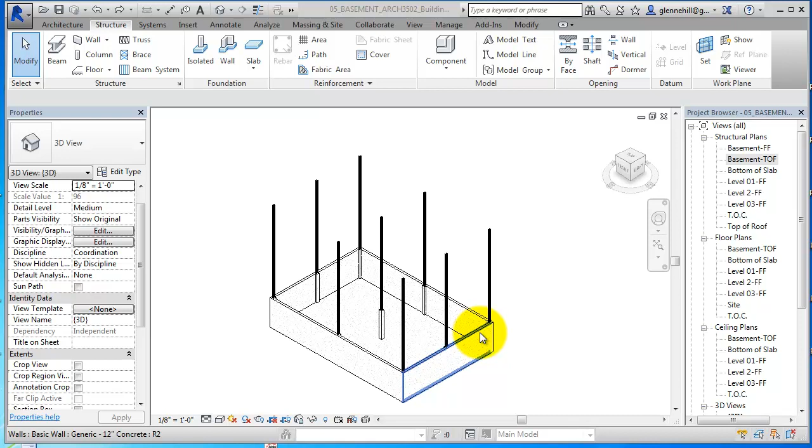In the previous tutorial, we covered putting the basement walls and floor in. So we can see right here we have a slab, our walls right here, and of course we put in the columns for our first floor, but also the columns that support the steel columns running up through the building. So they will come down, hit the columns, and the columns are going to hit upon a footing. And that is true with the walls too.

In Revit, it's usually easier to put in all your walls that you want to have footings and columns that you want to have footings under, then come back and add the foundation. In other words, unlike when you build it, which you start with the foundation and then you put those things on top of the foundation.

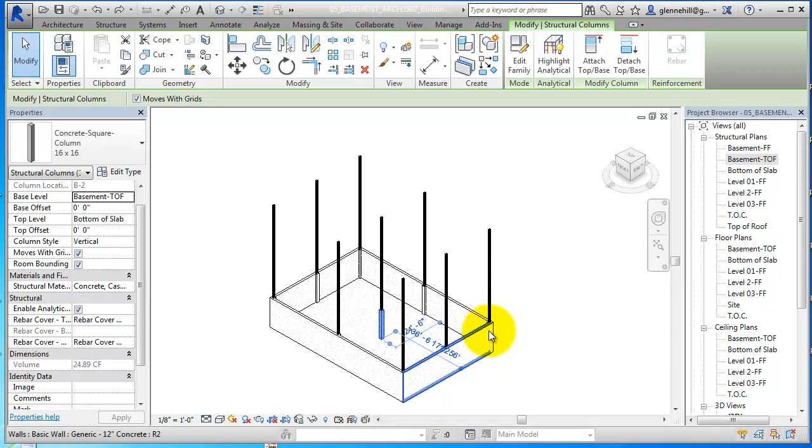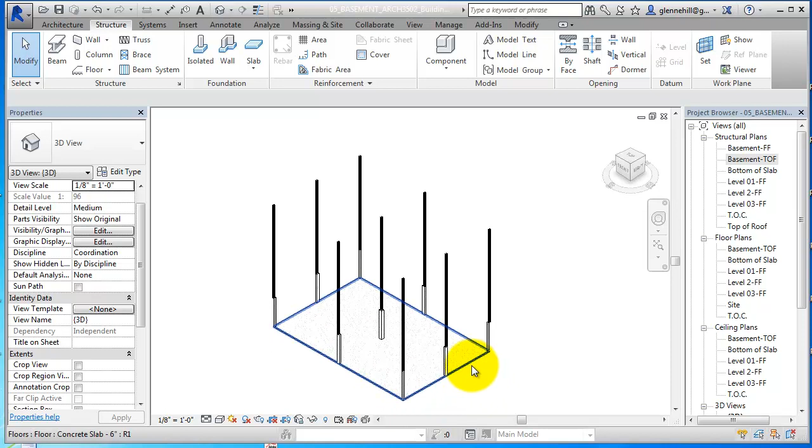So let's do this. The first thing I'm going to do is hide all of these walls because I don't want to visually see them while I'm working. So I'm going to hide by view category. Since they're the only walls on this view, I can just hide them all without hiding anything that I need. Also, I really don't need this floor, so I'm going to hide by element and get it down to the columns themselves. Now let's put a footing in there.

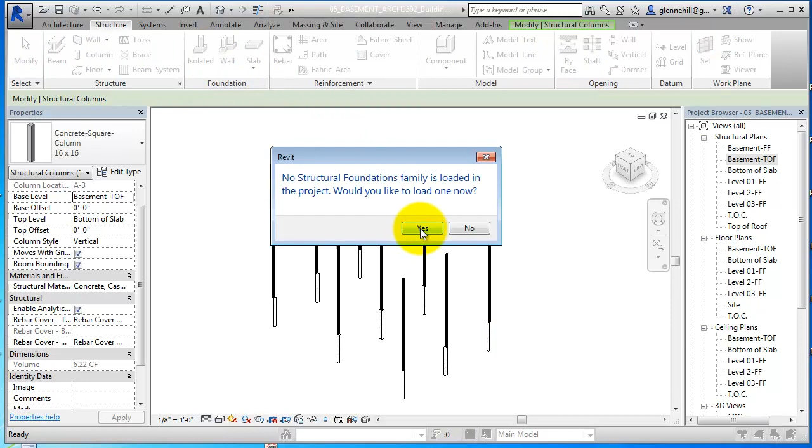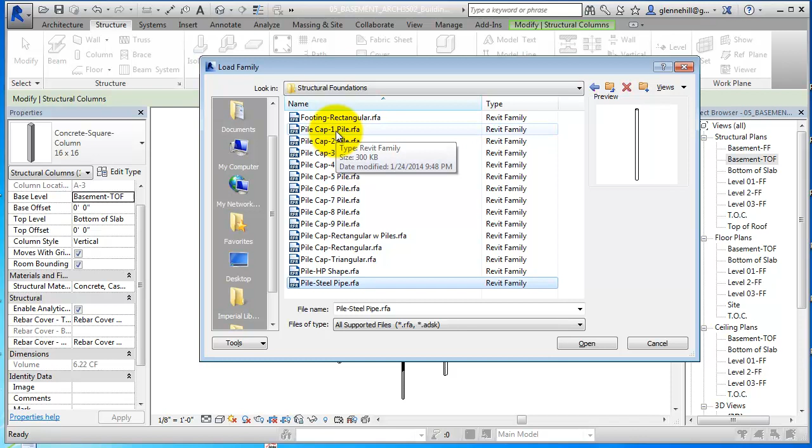So we're going to go to structure and go to isolated footing, and you'll see it says there's no families loaded here. So we're going to go to load families, down to structural foundations, and you can see a whole different bunch of piles - piling cap here, which is used with the piles, and then different types of piles, HP shape, which is a steel pile, and a steel pipe pile. I'm not going to worry about putting piling in right now. We're just going to go to a footing, rectangular, typical rectangular footing, and open that and load that in.

You'll see there's two default sizes, 72 by 48 and 96 by 72, 18 inches each. We don't probably need anything - well, we really don't know whether we need anything bigger than that, but that's a little bigger than what I told you in class. We just want a placeholder right now.

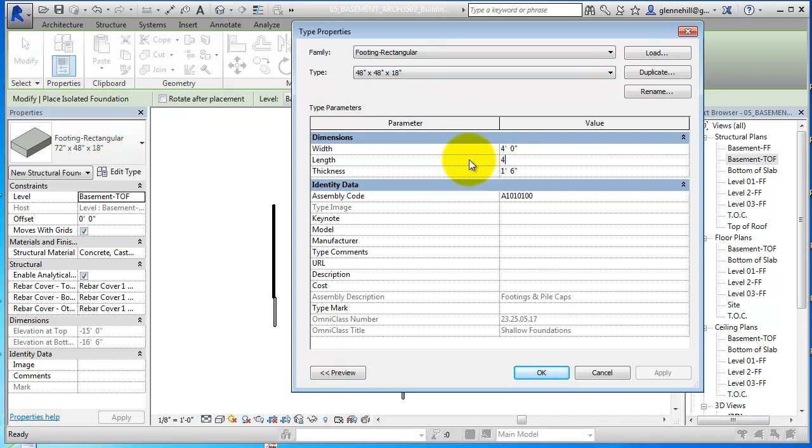So I'm going to edit type just to show you how to do this. I'm going to duplicate it, and then change this to 48 by 48. And then I got to change not just the name - I just changed the name, I didn't actually change the size. I'm going to change the size right here, so the length of that rectangular footing, and I'm going to say OK.

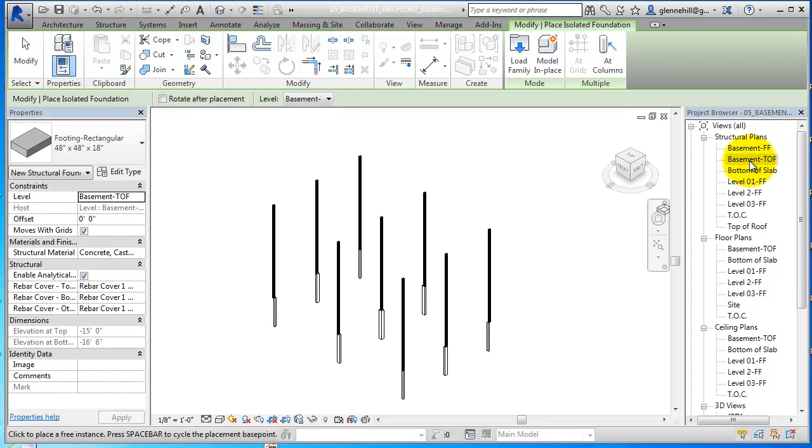So now you can see my little footing is on my insertion point, and I'm ready to insert it. But it'll be easier and quicker to insert it through the basement top of footing. This TOF is not top of floor, but top of footing - FF is finished floor. So I'm going to click on the basement, and we can see here's our basement view.

If we want to see the parameters of that basement view, we can go down here to view range and edit, and we can see that the cut plane is 1 foot above the basement level, the top of the clipping plane is at 2 feet, the bottom of the clipping plane is at -4, and the overall associated view depth is -6.

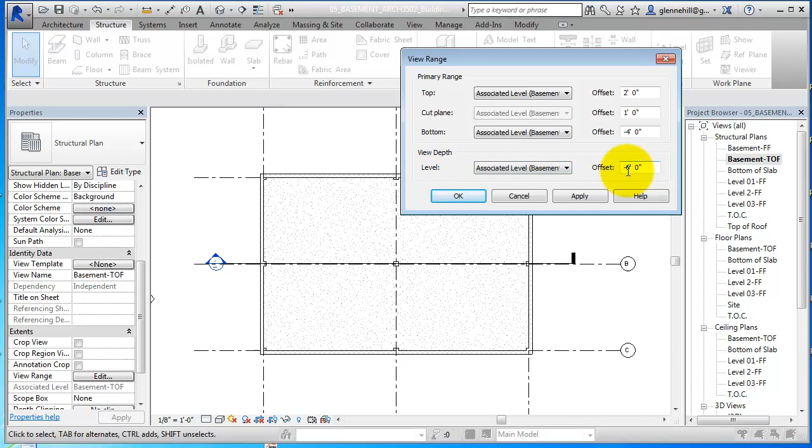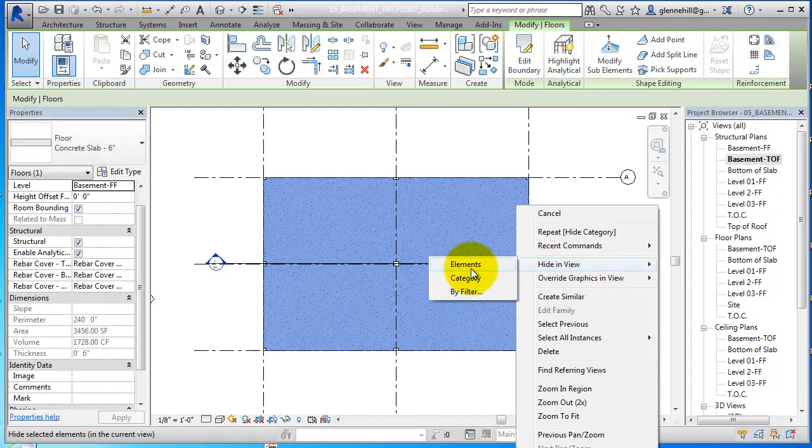So we're going to accept that, and we haven't hidden the walls here, so what I'm going to do is go ahead and hide the walls in this view for right now. So hide category, and then I'm going to hide this floor too, so we're just down to grids and columns. Notice that the wall right now is cutting the column because it's assuming that the column will be poured in with the wall since they're poured in place concrete.

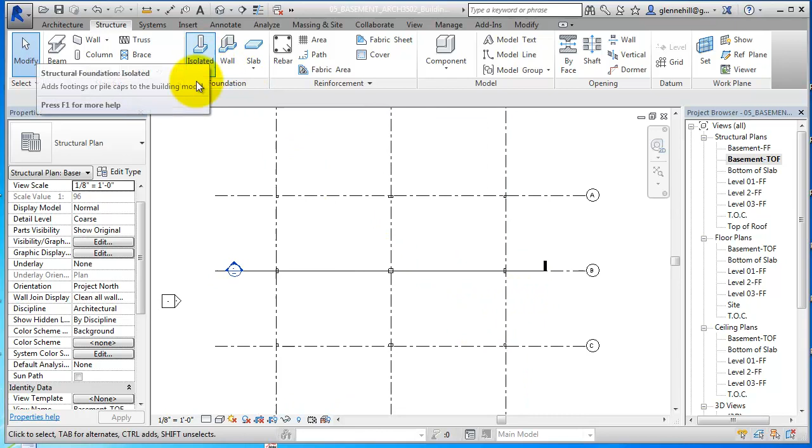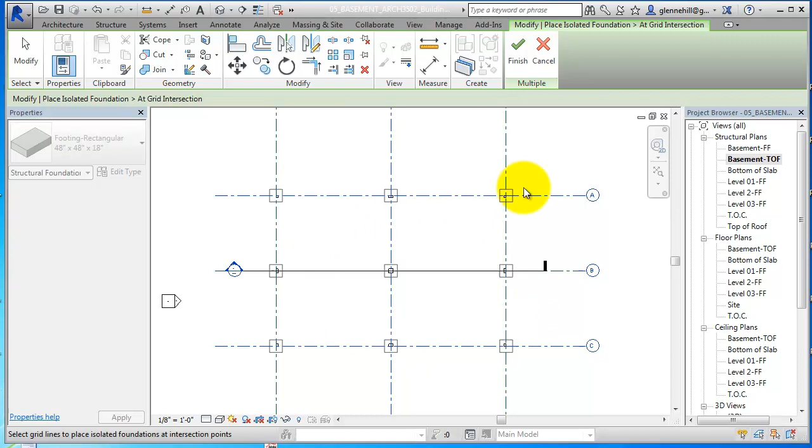So to place those piles, I'm going to go back to doing all that. I canceled out of the footing, so I'm going to go back into structures and into footing. So I have my footing here, and the easiest way to do this is just to place one at the crossing of all the grids. So I'm going to just say grids, select all the grids, and as you can see, it put footings there, and I'm going to say yeah, that looks great, let's finish it.

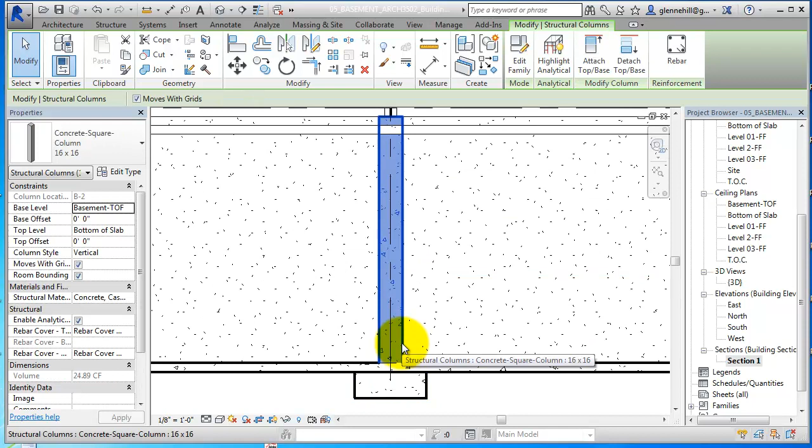Just to make sure, escape out of the command by hitting the escape key one time. What I'm going to do is go into that section we did earlier and take a look, and say, oh yeah, it's right there at the top of those footings. Well, how do I know it's at the bottom of those columns?

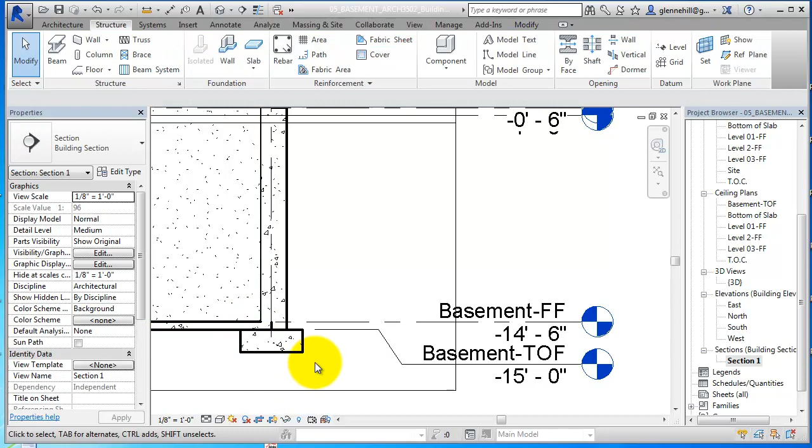My footing is set at top of footing, and if I select my column here, notice the base level of it is the top of footing too. So they're sitting on, right now it's being blocked by the floor, the concrete slab floor we put in earlier. Okay, so we got a good start now.

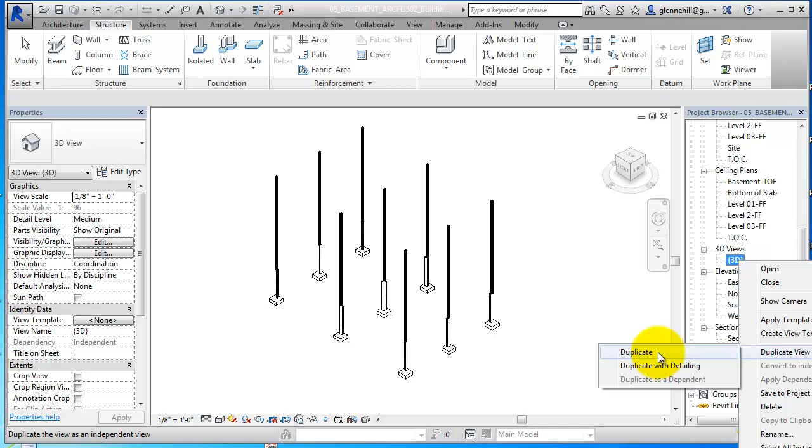The next thing we're going to do is go back to our 3D view. I'm going to save this view so I can come back to it. So I'm going to duplicate this view, and it'll give it another name, and I'm going to rename this basement foundation, since I've got things turned off.

So now I'm going to turn my walls back on. I clicked on the little reveal hidden elements, and you can see my walls right there. They're right below this curb slab element that I put in at the beginning that I've hidden.

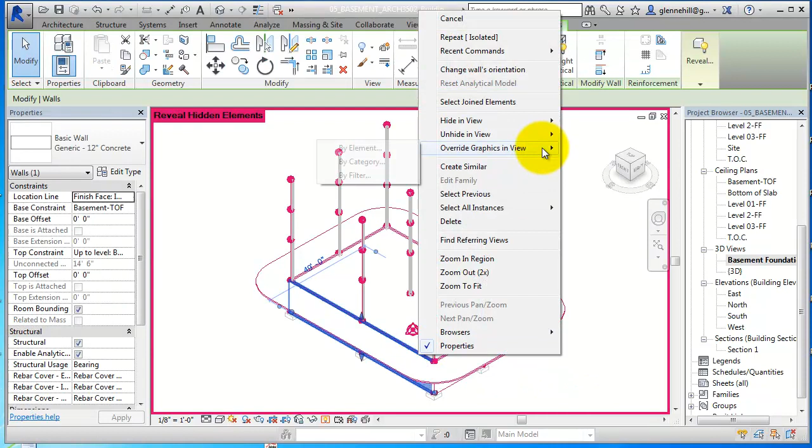You can see them right there, and I'm going to select it and do the same thing in reverse. I'm going to unhide in view by category, and that will unhide them. Then let's turn off all the other hidden views, and you can see now my walls are here, and there's my footing. So now I'm going to put a footing underneath that.

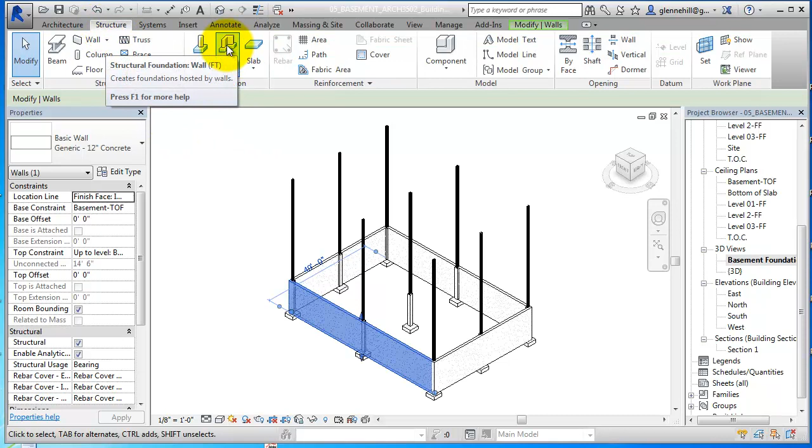To do that I'm going to go back to structure. This time I'm going to put a footing under a wall, structural foundation wall, and we'll see there's already a few loaded in: one bearing footing 36 inches by 12 inches, retaining footing 24 inches by 12 inches by 12 inches. 36 inches is probably a little wide, but we'll go ahead and take that. Better safe than sorry. So I'm going to take the 36 inch, 12 inches in depth.

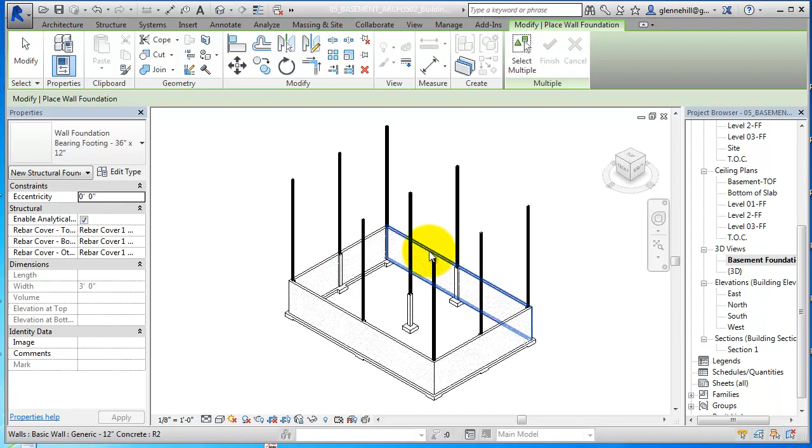To place that, since it's a special type of footing, I can do it by selecting multiple walls. As soon as I select a wall, notice it poured the footing. I'll do that here, here, and here. So now we have a footing underneath.

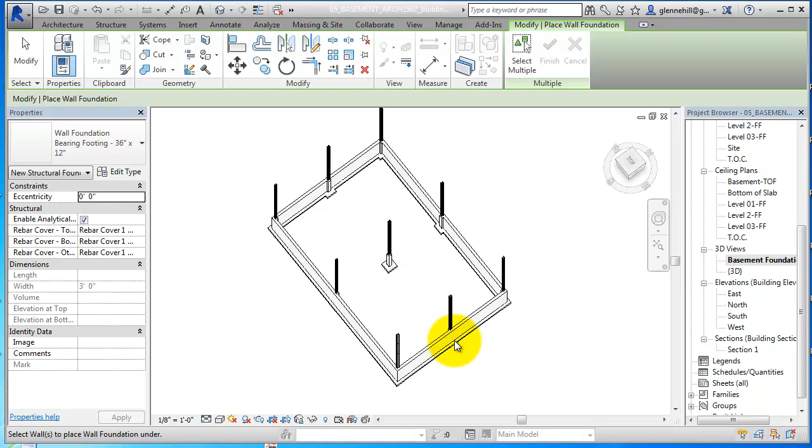The next thing we're going to put in is our grade beams. Remember that our grade beams are the connectors here, as we talked about in the lecture. So there's going to be a grade beam from here to here, a grade beam from here to that footing, and that footing to that footing, and that footing to that footing. So we've got kind of a 1, 2, 3, 4 grade beams.

Now there's no grade beam. If you go under structure, you're not going to see grade beam in here. So what we're going to do is just use a typical beam, but we're going to make our own beam.

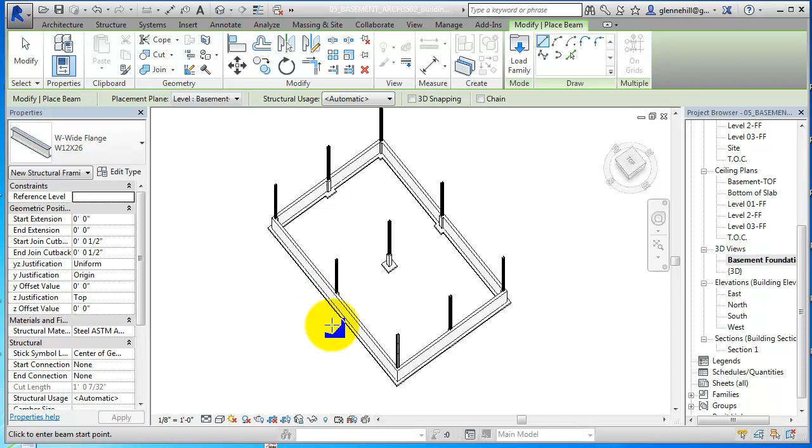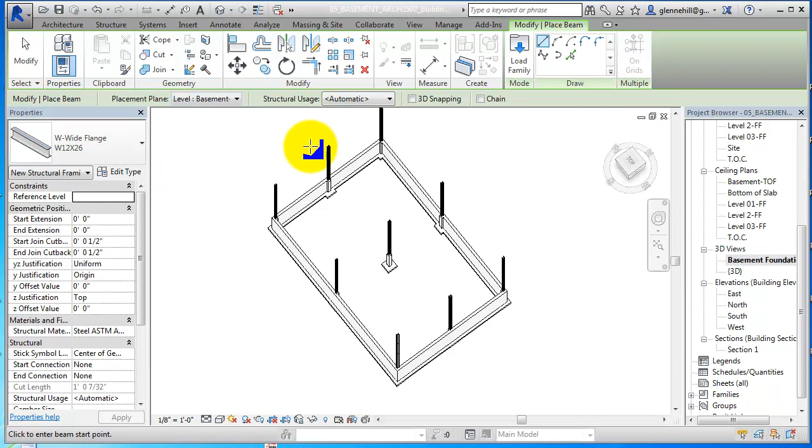We're going to assume that the beam is at the same depth as our footing was. So it's at the top of footing, and it's a depth of 12 inches. And let's say it's going to be 24 inches instead of 36, because we don't need as much load there. So I'm going to go in here, and we'll notice we don't have any concrete beams loaded.

So I'm going to have to go in here to load family, and go down once again to structural, and you'll see framing right here, structural framing. Instead of steel this time, we'll go into concrete, poured in place concrete, and you'll see rectangular beam.

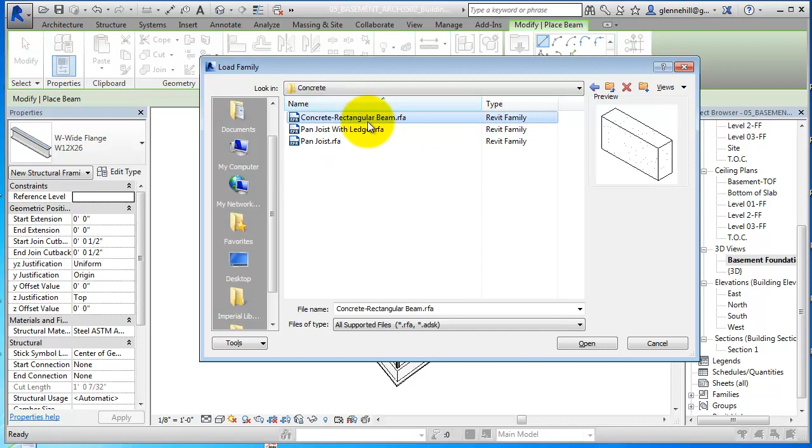So I'm just going to open that rectangular beam, and then edit the type, and duplicate this, but I'm going to call this a grade beam, so that I know it's wider than it is deeper. We'll put a colon there, and I'm going to say grade beam, and I want the height and width to be 24 inches by 12 inches deep.

Oh, we can't put the colon in, sorry about that. So we'll delete it and go with grade beam 24 by 12. You'll see the B dimension and the H dimension. The B is the width, so I'm going to set this to 24 inches, and the H is the height, I'm going to set that to 12 inches. And that makes our grade beam.

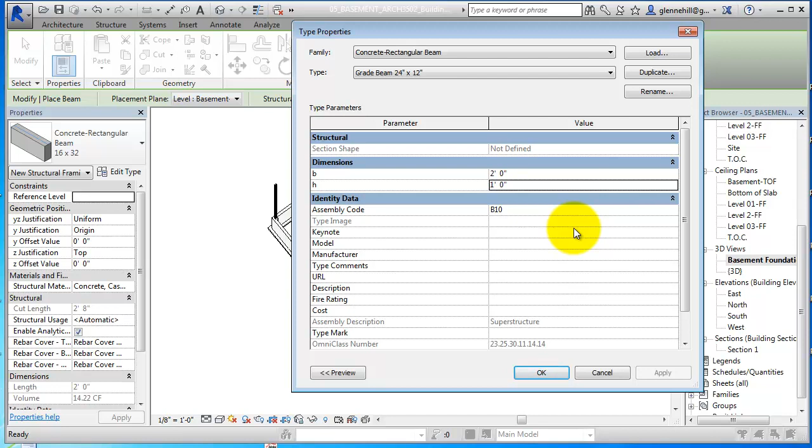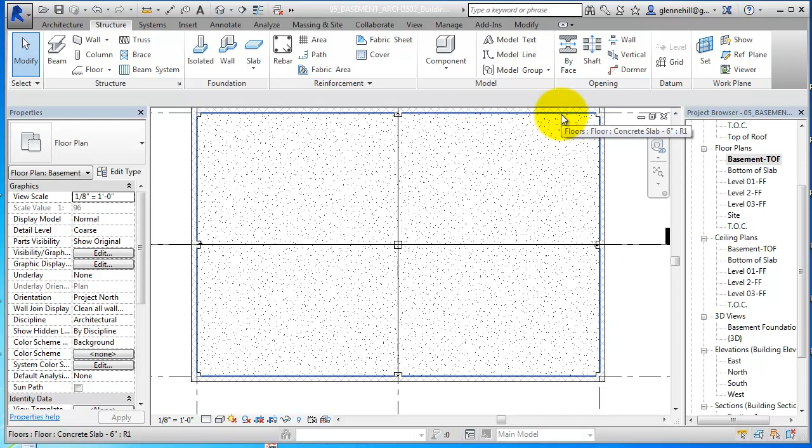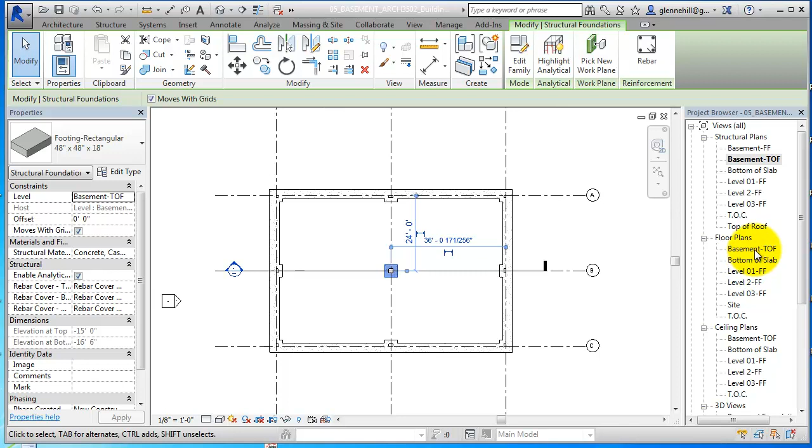We're in good shape now. I'm going to go back to my structural top of footing plan, and draw in this grade beam, but I won't be able to see it because of this floor, so I'm going to hide that floor. Oh, that was basement, no, that was a floor plan, let's close that. Let's go to structural plan instead, so we can see our footings. You've got to be careful about that, especially if they're named the same, make sure you're under the right category. I do that all the time.

Since we're in the top of the footing plan, the default is going to place that beam at its top. So we'll go into beams, select that beam, and check your settings over here. We're not going to justify any of this. The Z justification will be at the top, so this beam will be placed by the top and extruded downwards. Level is top of footing, and structural usage we'll say automatic. So we're going to place a beam.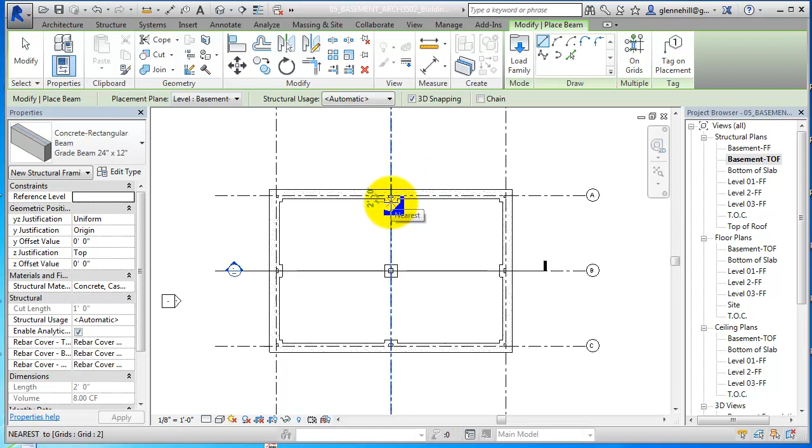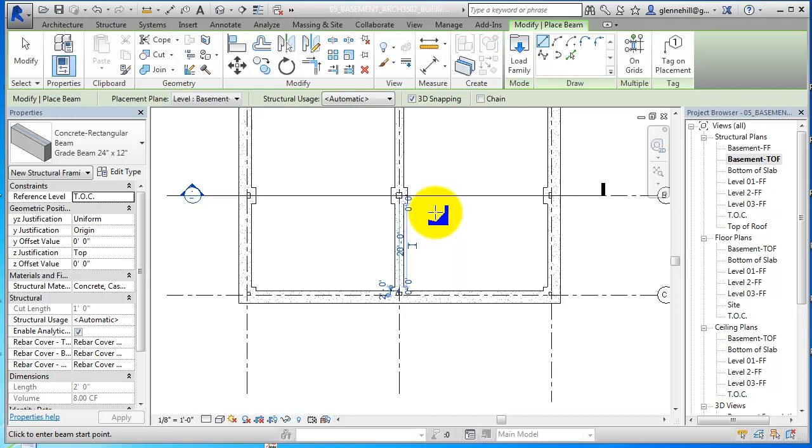Might turn on 3D snapping, make this easier. We're going to go in and place a beam from here to there, and from here to there, and from here to the intersection of there. We may not have got that one touching. We didn't, we'll come back and edit it in just a second.

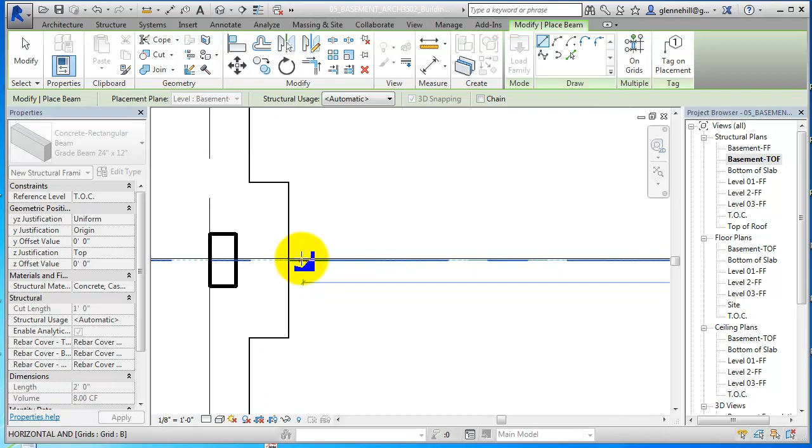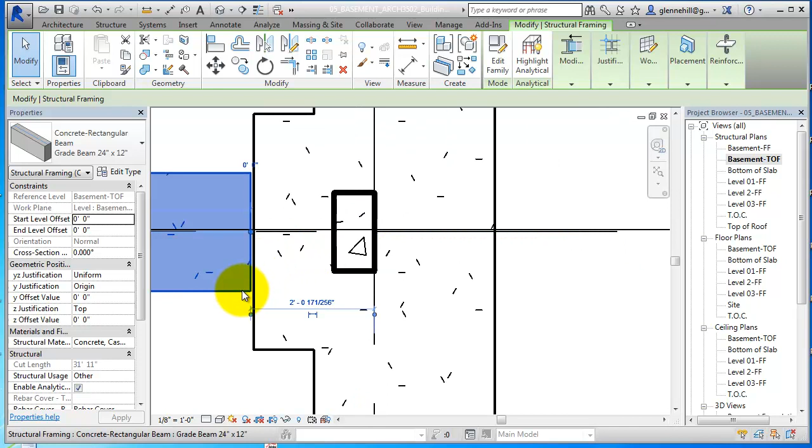I'm going to go ahead and do this, so we got the intersection that time. And we want the intersection here. I didn't touch there either. Okay, so we can just modify these. I can grab this and touch it there, that one's looking good. And this one, I can connect it there.

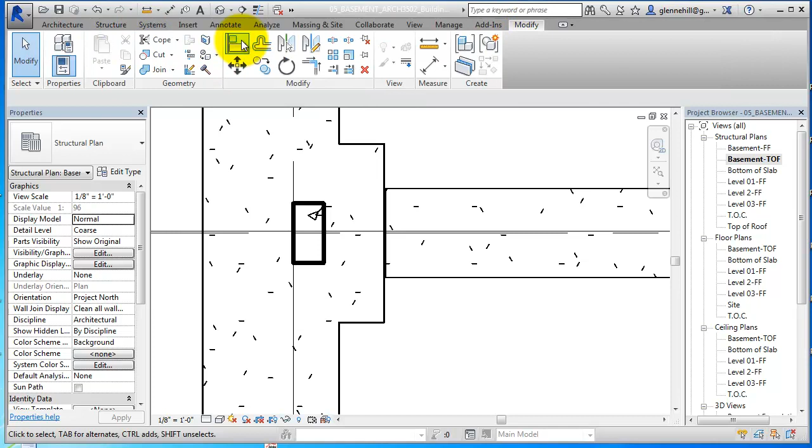So I don't have this one connected, because if I did, they would join together. You can see the line right there where they aren't connected. So what I'm going to do, probably a safe way, is go modify and do an align. I'm going to align to this surface right there. Then I could lock this, so if this footing changed and got larger, it would update. Now I didn't lock any of the others, so I won't lock it right now, but it'd probably be a good thing to do.

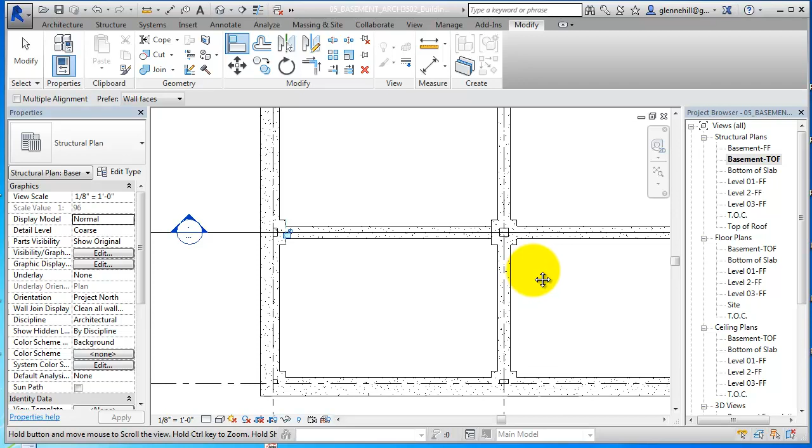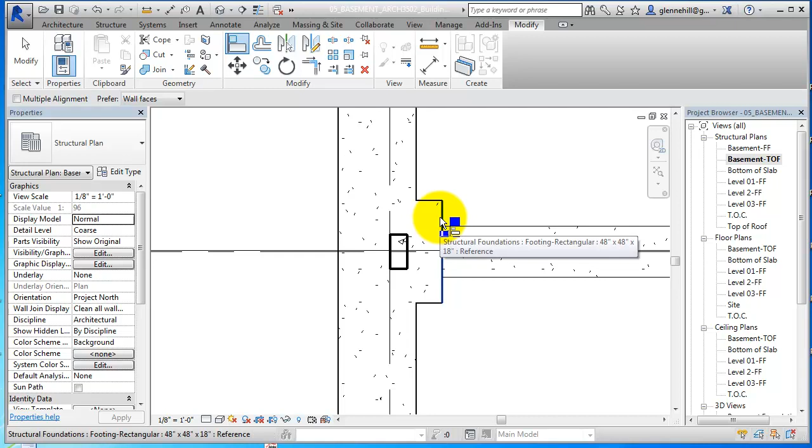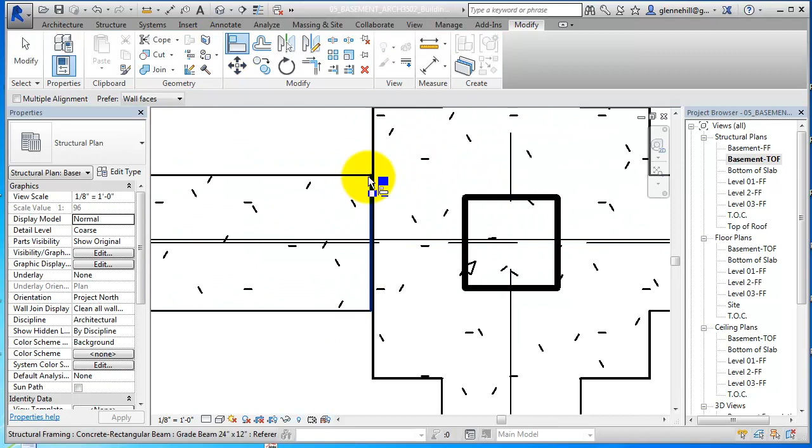Same thing here, I've got a similar problem. So now my footings are aligned, and that's just a simple align—you select the things you want to align to, and then you select the item you want to align. Does not take... okay. We'll lock it. I'm going to get out of that command by hitting the escape key twice. This didn't align either, I don't know why it didn't hold. Let's lock it this time. Yeah, it did when I locked it.

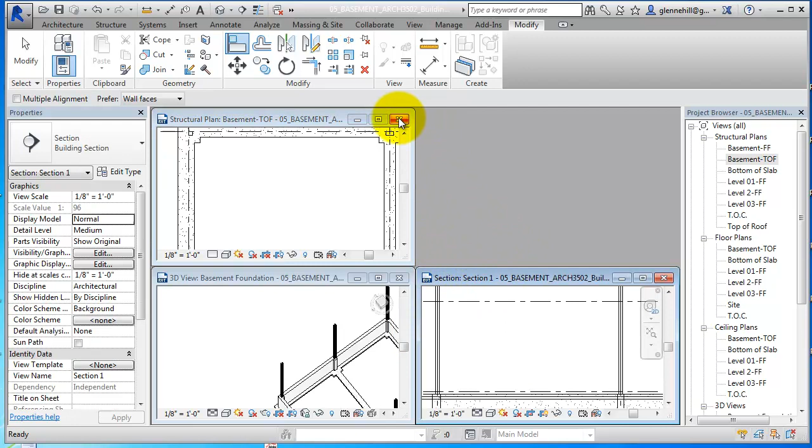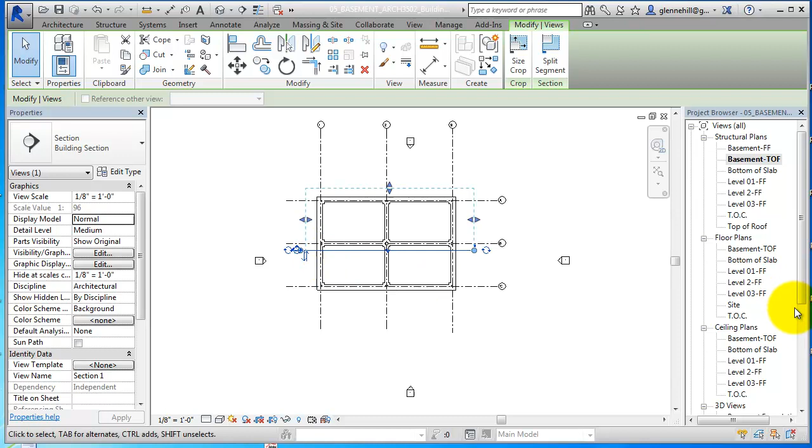Okay, so let's check it though—trust but verify. I'm going to close this view and go into a section here, and we can see there's our grade beam right there. Can't see it really well, so we might go back and move the section cut just a hair so we're not cutting through the grade beam but actually through the wall footing. We'll go back then to that section. It's really great to use your views so that you're able to see.

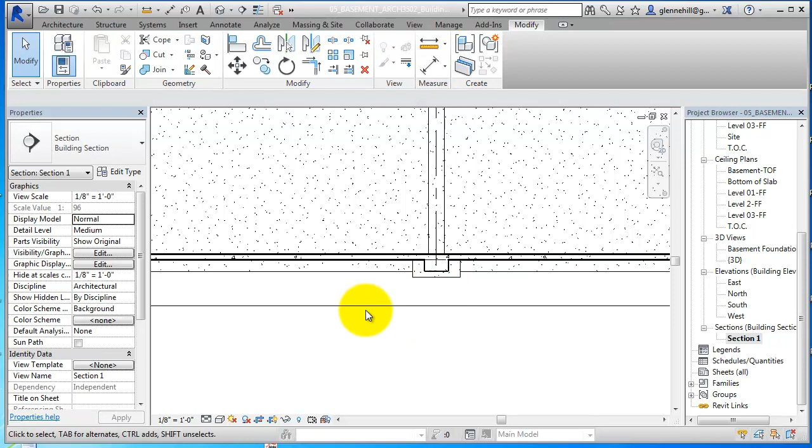So you can see the grade beam right here, and it's shorter than the footing for the column. There's the footing for the column. There's a grade beam there, and a grade beam right there, and of course our floor slab. And so now the structure and the basement are complete.

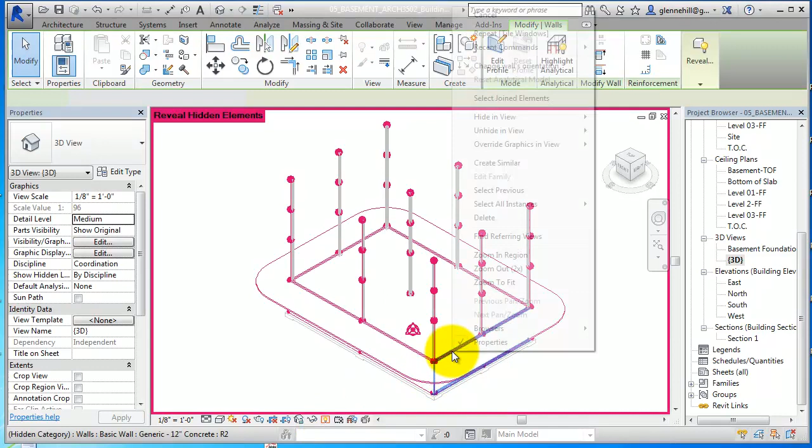If we go back into our 3D view, our generic 3D view, we can see right there, and I'm going to unhide. So I'm going to come in and say, let's unhide these walls again. And let's unhide—we'll unhide that slab too, but we can do that later. Okay, so that's how we get a foundation for our building. Now we've got a foundation, all of the columns, and we're ready to start laying in beams.